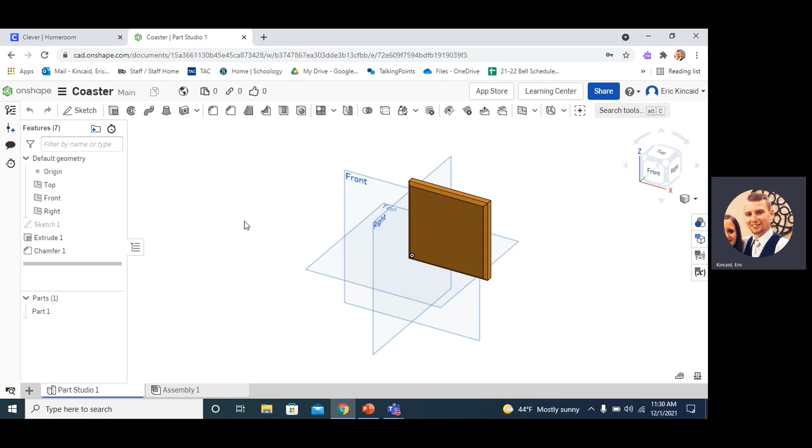All right, we're going to start by opening our coaster where we left off yesterday. So I just hid those planes by hitting P. That way we just have our item here, right? And we're going to create a new part to this file. So this will be our coaster, and then this will become pretty much our folder for our entire project.

So right here where it says Part Studio 1, I'm just going to rename this by right-clicking and choosing rename. I'm just going to name it Coaster really quick here. And then I'm going to hit this plus down here and insert new element. And I'm going to hit Create Part Studio. And it's going to create a new part for me within the same file. So same thing here, I won't have to reshare it, nothing like that. Everything is ready to go.

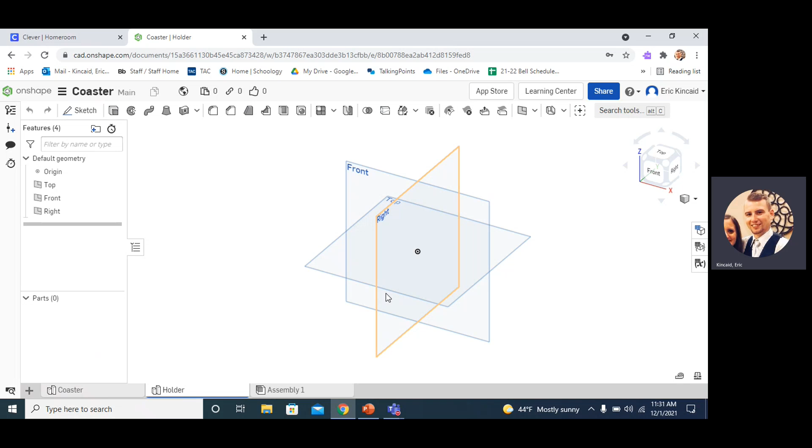And I'm going to rename this to Holder. So we have our coaster, then we have our coaster holder. And our coaster holder is going to be very similar to our coaster, but it'll have dowels, which are cylindrical pieces of wood, sticking up, and that's what holds them in place. So to start, we're going to draw essentially the same coaster.

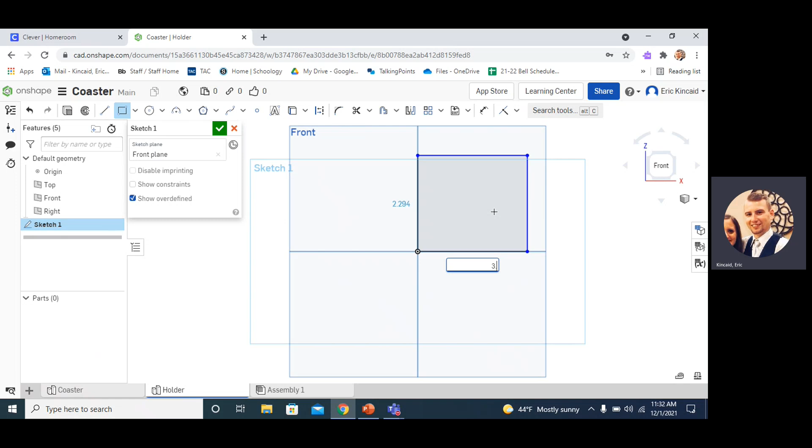So I'm going to start with my sketch tool, click on my front plane, and I'm going to move through this quickly because we really don't need to explain it again because we already have our coaster. So I'm going to click on the rectangle tool, click on my origin, move up and click, and I'm just going to type 3.5 by 3.5 and hit enter. Okay, so I'll hit that green check to end the sketch, and we're going to extrude it the same way.

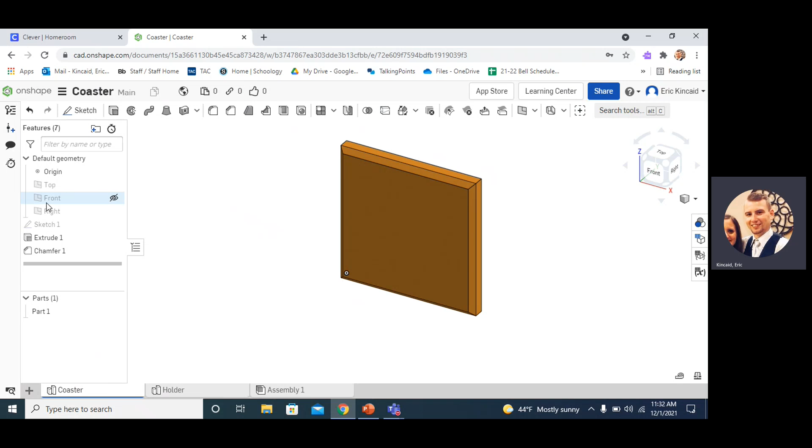So essentially, whenever you make your set of coasters in real life, you're going to create 5, because the last one is going to be your holder, and then 4 will be used as coasters. So I'm going to extrude this out 0.325, the same as what we did on the past coaster. All right, so hit the green check mark. You know what? We might have made that 0.375, huh? Let's double check it. It is 0.375, not 0.325. So I'm going to change this back, sorry, to 0.375 on that extrusion.

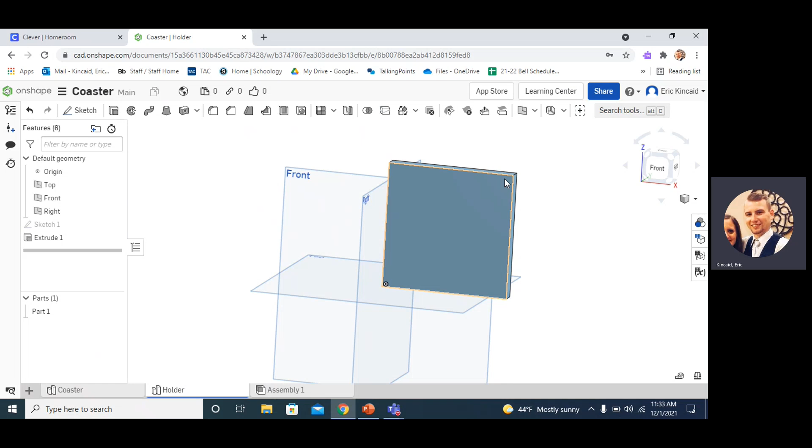All right, and what we're going to do is now edit on this face. So I don't want to put the chamfer on there like I did the coaster because we're going to need it to be flat so that we can take measurements from these reference edges around it. So I'm going to look at this straight on, and now for the first time we're going to create a sketch on the front of our part. So I clicked New Sketch, and then I'm going to click on the top of that part in order to draw on it. So now I'm not sketching on the same plane as where that coaster came from, but rather I'm sketching on top of it.

And I'm going to create a circle, center point circle, and I'm going to move over and just draw it right around here. And we're going to type in here, we need this to be 3/8. And if I type a fraction, you'll see it converts it to a decimal. So we're going to make that circle 0.375. So to create a circle, you just click. So I'll do it down here again. Click again, and then you can type. You don't have to click where that number is. So you just type 0.375 and hit enter.

All right, so right now I have 2 circles, and we need to place 4 total circles, but I'm only going to do 2. And I'm going to line them up, and then I'll show you how to mirror it over to the other side to make it a lot easier, right? Because we need the same thing over here too. So to position this, I'm going to move it 3/8 of an inch from the top and 3/8 of an inch from the side. So I'm going to grab my dimension tool.

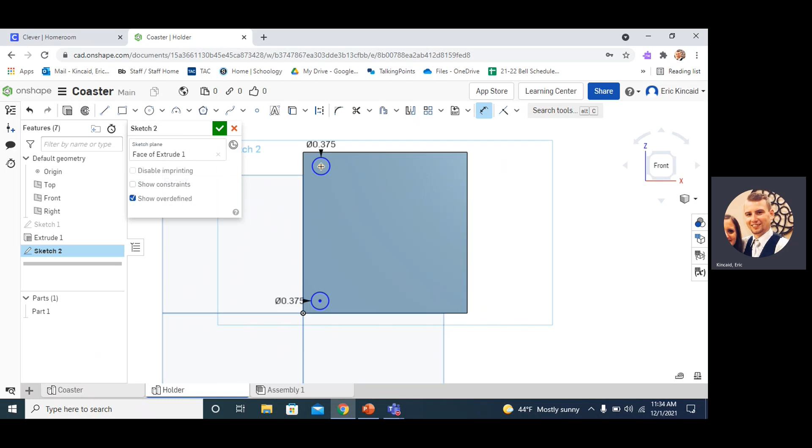So I can hit D on my keyboard, or I can click up here, dimension tool. And I'm going to click on the center of the circle and the left side of my rectangle. So I'm going to click, and I'm going to type 0.375 and hit enter. All right, so now the center of this circle is 3/8 of an inch from the left side of this reference.

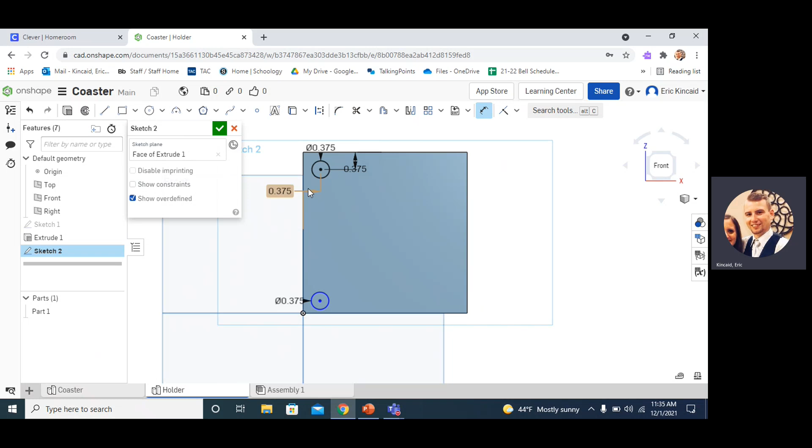Then I'm going to click with my dimension tool on the center of this circle and the top of my part. And I'm going to say I want this to be 0.375 from the top. All right, and it's going to position this in an exact location that we need it. Okay, so I'm going to grab my dimension tool again and do the same thing down here. Click the center point of the circle and the bottom of my part, 0.375. And then I'm going to click on the center point of this circle and the left side again and make that 0.375.

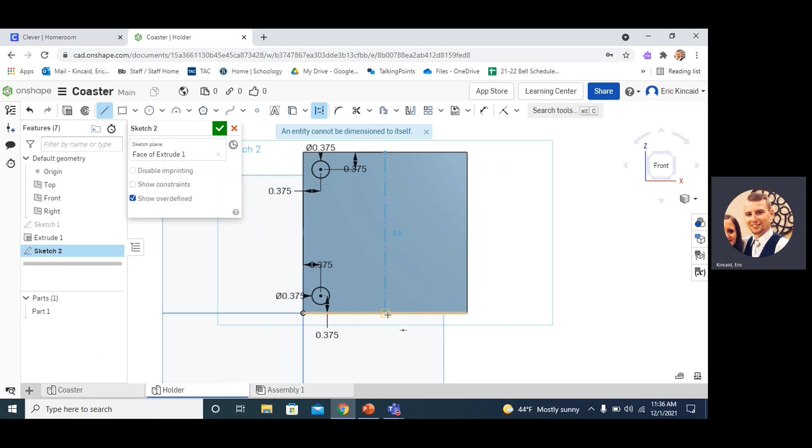All right, so you can simply do this, and you can do it over here 3-4 times, that's fine. Or what you can do is grab what's called a construction line right here. I'm going to find the center point of this part, and I'm going to draw a construction line right down the center. Oh, sorry, you have to click on construction and then line. So I'm going to click on the center point and then move it down and click on that center point. So what I've created is where the halfway point of this part is.

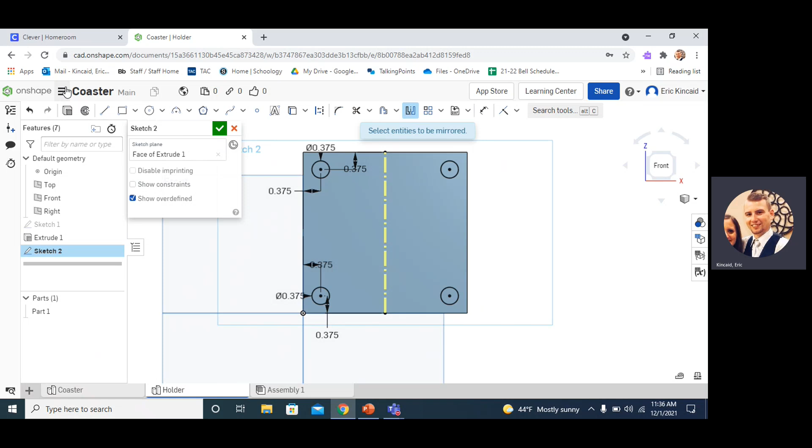So if I want to mirror something and put it in the exact same location but on the opposite side of this line, I can use the mirror tool up here, and it says select mirror line. So this becomes our line. This is our center point. Select entities. I'm going to click on the outside of this circle, and you'll see it moves it over there. And then click on the outside of this circle, and it does the same. I'm going to hit the check mark, and now I have where our dowels will go in real life drawn on this part. So if I rotate out, you can see in the sketch itself there are circles.

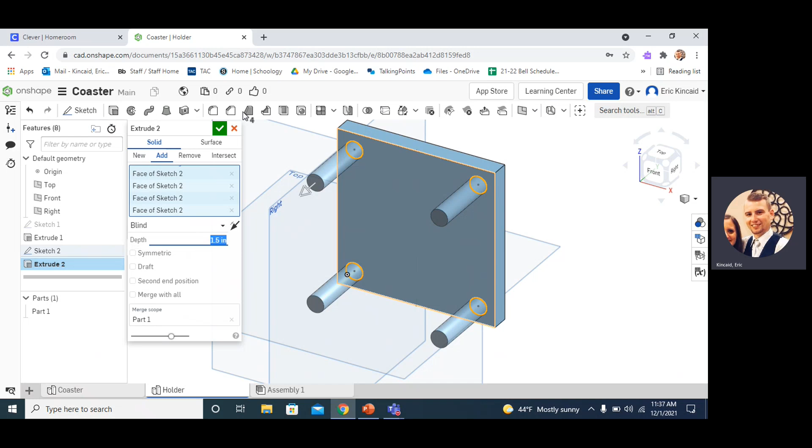So I'm going to grab my extrude, and we can extrude out from our part. What we're going to do is extrude these out 1.5. Right, and that'll create our dowels that stick out of the top of our part. So I'll hit my green check, and there is our coaster holder. And actually, if we didn't sketch it on the front, we could have put it on the top, and then we could have placed our coasters in it. So I'm going to change the color here.

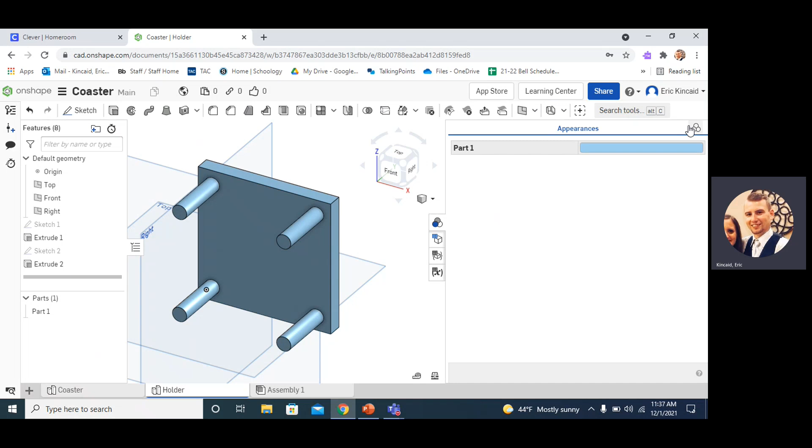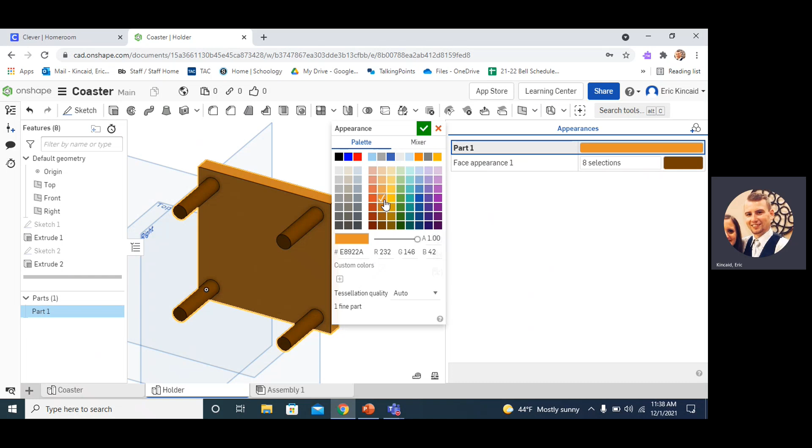I'm going to change the color of the bottom and these dowels so that they're two different browns. So what I'm going to do is hit Add Face Appearance. And I'm going to click on this dowel, this dowel, this dowel, and this dowel. And I'm going to say I want these to be darker brown. I'm going to click on the tops of these two. I want these to be darker brown. Okay? And I'll hit the green check. And then I'm going to change part 1 to a lighter brown, just so that you can see a little bit of contrast.

All right, and you should have already shared it with me. You don't have to share it again, but this is going to give us the dimensions we need to create our parts. All right, so whenever you're finished, that is it for Onshape creating the coaster. So we have the coaster here and the holder here.

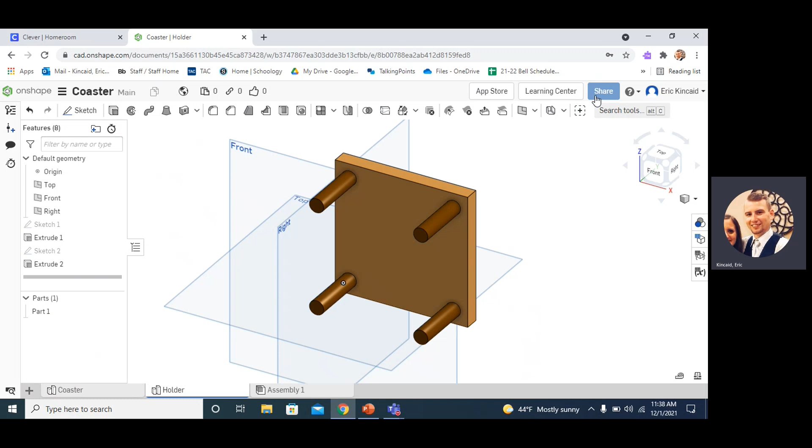Good luck. You can always go back in the video if you need any help. If you didn't share it yet, make sure you hit that share. Go to Teams, select your period, and then change it from Can Edit to Can View and hit share.